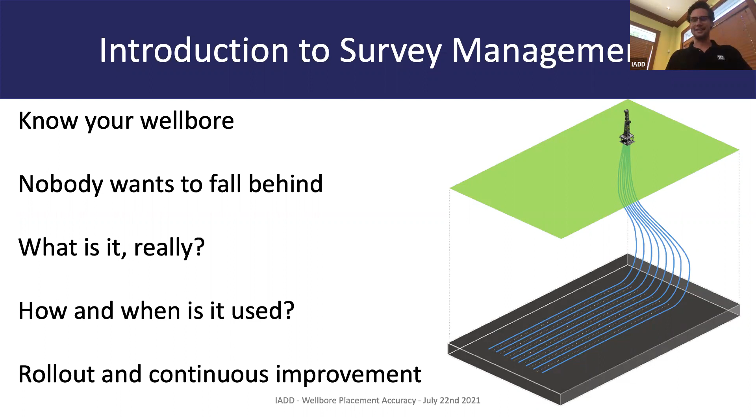So the first thing I'll actually ask you all: why do we survey? Can anybody tell me why we survey? Yes, thank you. That is exactly right. We want to know where we are, right? Whether we're surveying our property lines or we're taking MWD surveys, we want to know where we are. But sometimes it's not just good enough to know where we are. We need to survey accurately.

And this might be we're infilling an existing pad. In this case, we might be surveying or at least correcting surveys from old historical wells because we want to know where we can put our new wells. Some new drilling campaigns are just designed to have tight spacing, and that's really important to know where they are. And that ties into avoiding collisions, which I think should be pretty obvious why we want to avoid most of the time.

I used to make the joke last year that survey management can help us socially distance our wells, and also help us avoid trespassing. And that's crossing lease lines, crossing hard lines. Knowing where our wellbore is more accurately can allow us to achieve these goals.

When we're talking about production, as I mentioned earlier, it can help you stay on target, stay within your zone more efficiently and more often. And finally, wellbore quality ties into all of these things. You'll hear the word tortuosity thrown around a lot, explaining these bumps that are probably not recorded within surveys. But knowing those can really help us make those decisions down the line.

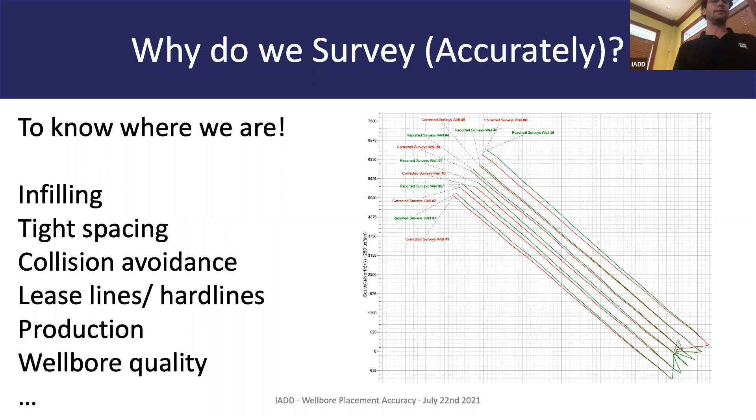How are we going to run casing? How are we going to install these pumps? What kind of life expectancy do we expect out of those things? So the first thing we need to talk about is the magnetic field. The Earth has a magnetic field, and MWD tools basically work like compasses. They align with the magnetic field, which runs north to south.

Unfortunately, we don't just put compasses inside of our BHAs anymore, even though that's basically what single shot surveys used to be. Go down, take a picture of a compass, bring it back up, see which way that compass was pointing. We also can't put a GPS inside of our BHA, because I don't know about you guys, but my GPS doesn't even work in my parking garage at work, let alone downhole.

The thing to know about the magnetic field of the Earth is that it's always changing. And before I get berated by the geophysics team, let me explain what I mean. It changes because there's a main field. The main field is in the outer core of the Earth, and it's a bunch of magnetic material that's all melted and sloshing around, creating this magnetic shield, shielding us from cosmic rays and the sun's radiation. And it also allows us to take MWD surveys, which is why I'm talking about it.

And this changes over time, all the time. Magnetic north today won't be the same magnetic north tomorrow or in 10 years. It's always just drifting around. And in fact, the north and south poles have switched completely, millions and millions of years ago. Hopefully it doesn't do that anytime soon, because it'll be an issue for our infrastructure.

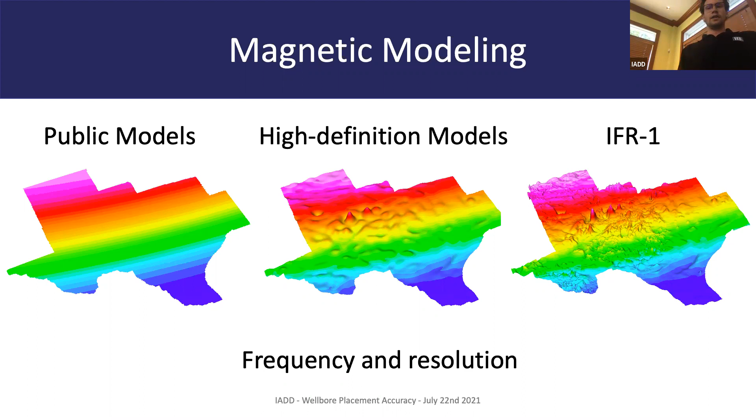So to go one step further, we can take direct observations to create these models as well. So this is extremely helpful for places where we either can't fly, things like planes, or usually what happens is that a company or somebody has an IFR coverage somewhere, but they didn't really anticipate drilling right outside of it, but now they don't have that high resolution data.

And so what can happen is just sending people out to the field. We'll send this guy with a theodolite out there, just taking some measurements. And we can add that data to the main field data or high definition data. And we can create a model that's IFR or better in terms of the resolution. This can also be applied on top of IFR1 if we really want to reduce that uncertainty even more. But I think the really big value is creating IFR in places where there hasn't been that data captured yet.

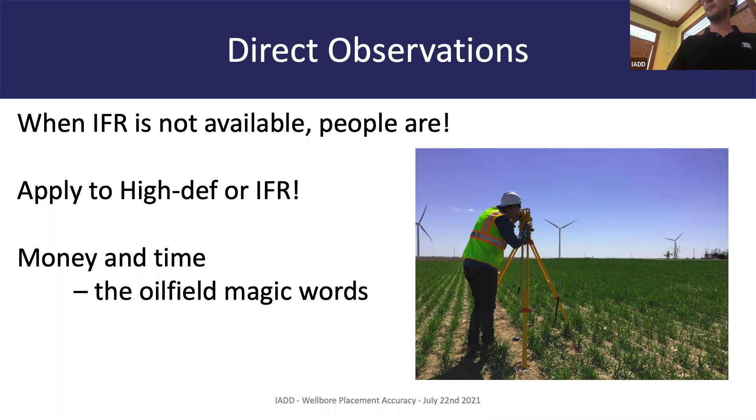This is pretty great because it saves money and it saves time. And as far as I've been in the industry, I can pretty much say those are the magic words that I hear every time. We need to go faster and we need to do that to save money. So what's next? I mean, finding the magnetic field and getting a good model of that is great. There's other things that we sort of need to consider.

MWD tools are created by 6 sensors, 3 magnetometers, 3 accelerometers. Some of them measure gravity, the magnetometers measure the magnetic field. And just like any measurements, these are going to have some errors associated with them. Well, the very biggest one is going to be drill string interference. And drill string interference affects that magnetometer that's pointing forward. And this is because your BHA isn't made of plastic. There's some non-magnetic material there, but there's also a motor and there's also some drill collars and all sorts of things that are creating this magnetic field.

And it's essentially just like holding a magnet to a compass. That compass is just going to align with that magnet. And now we don't know where north is anymore. So if we don't take this into account, we're going to be going the wrong way. What's important to know is that things like choosing a better magnetic model doesn't really require any more workflow. You basically just get that magnetic model and use it in your data.

Something like correcting for sensor errors does require workflow change. And so this can be a little bit difficult for some people who just want to do the same thing over and over. But this requires some sort of analysis. In some cases, this requires extra surveys in some places, namely drilling an east-west lateral can be very difficult or impossible if the proper workflow is not taken into account.

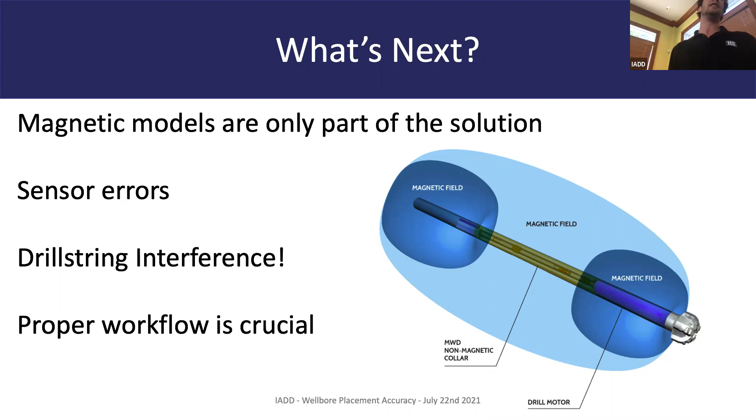But wait, there's more. There's misalignments. So I like to say there's different flavors of misalignment. The most common flavor, vanilla, is going to be our sag error. So this is probably the most common error when we talk about misalignments, and it's sag. Usually I just explain this as a steel beam supported on two sides, and for lack of a better word, it just sags in between those beams.

The issue comes up when the MWD tool is in part of that sagging area of the BHA, and now it's not representing where the bit is pointed. And so over time, we just have consistently incorrect inclinations over and over and over. And now we have a TVD error at the end of the well. So it just kind of accumulates throughout the well.

Other flavors, so the sensor packages, and what I mean by this are the accelerometers and magnetometers, those three aren't aligned axially, so it might be twisted, for example. And then single sensors, so maybe just a single magnetometer within the tool can be at, I don't want to use the word non-orthogonal, but it's no longer at 90 degrees, so it's just not where it should be.

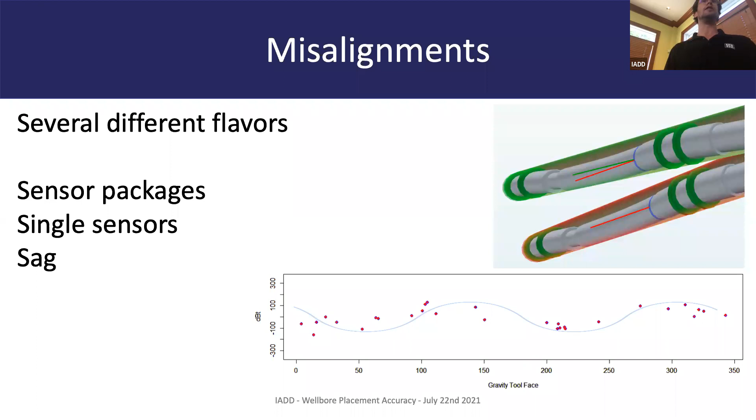Things like sag, we cannot see with downhole data. QC data is not going to show you anything because you're still measuring properly. We're just not measuring the bit's behavior. Single sensor and sensor package misalignments can be seen, but you really need to know what to look for. So some of these are tool face dependent. Some of them have different behaviors that if somebody's not really looking out for it, which typically in the field they're not, they're just going to go unnoticed. And these can have some pretty serious ramifications on bottom hole location that'll just go totally unnoticed if they're not being looked for.

Another one that's been quite popular in the last few years is survey frequency, also called the Stockhausen effect or survey aliasing. This is basically all relating to surveys being hopefully taken at 90-foot intervals. But what happens in between, right? We don't know. There's this assumption that surveys between them are just perfectly circular arcs. I don't think anybody truly thinks that's the case though.

There's some sliding and then rotating, or maybe there's some rotating and then sliding. Maybe there's a little bit of both. Maybe the formation is dropping you. Maybe your motor has some sort of impact on your inclination, and we're just not capturing that because all we look at are surveys every 90 feet.

But lucky for us, most of the time we have the data, just nobody wants to look at it. It is pretty ugly data, but we're in the data analysis group, right? So we should be fine handling that. Once we actually look at the data, we can see these trends and apply those trends to our wellbore trajectory and get a more accurate representation of where we are.

So this really isn't anything new. The first paper from Bill Lesso and Ed Stockhausen was about 20 years old. And these are things that offshore drilling has been doing for quite some time, because if you have the data, you might as well use it. And I think they are more inclined to use a little bit more technology. But US land and other land drilling operations are starting to catch on. I'm not sure, this might have something to do with LinkedIn just kind of blowing up with this.

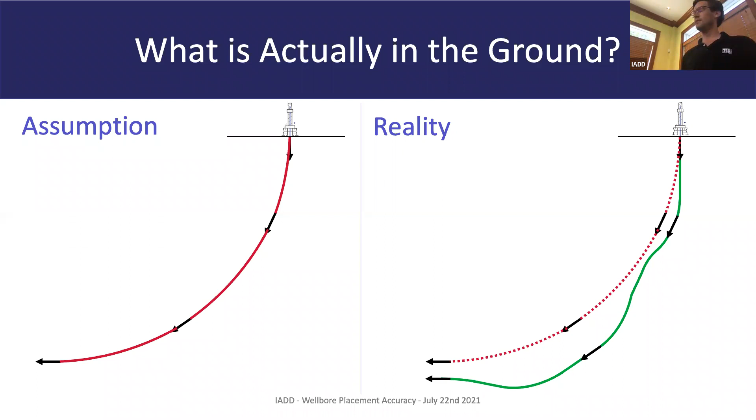But an important thing to remember is that it's not just all algorithms. Algorithms are great. Believe me, I love them just as much as the next person. But it's important to see the other side of things as well. We need to focus on our workflow. We need to all be working together. There needs to be this group mentality of having centralized data, data that we can get once and don't have to ask for again.

If we're running multiple services as a survey management company, it's important to not be berating people with, oh, I need a well plan. Oh, I need the well plan again. And I need the BHA reports and so on and so forth. It's so important to build that relationship, make things easy, and streamline the entire process.

And when we say QCing data in survey management, we're typically thinking, what's the total magnetic field? What's the dip angle? What's our total gravity? This typical QC data is great and very important. But on top of that, we need to make sure that all of the data we receive is also QC'd.

I think we had one well that was supposed to be drilling in West Texas, and they added a 0 or their geodetics was wrong, something, and they ended up in Florida. When you submit those surveys, that should raise some red flags. We drilled the fastest, longest well in the world, you know. So those things are very important, and they're easy to let slide by.

Things like the floor height of your rig, your RKB, your location, all of these things. They just need to be double checked and cross-referenced, and we need to make sure they're correct. So there's more than just a data analysis side. It's also a document revision side.

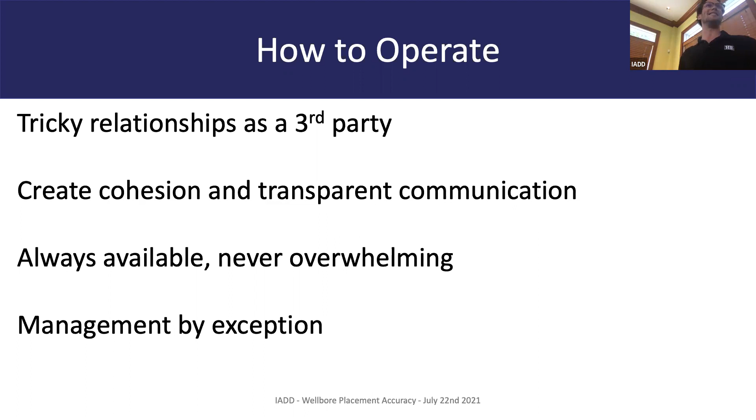But it's important to have that distinction and create this escalation process that we can be confident in and that everybody that we work with can be very familiar with. And so always available, never overwhelming. Somebody can use that tagline. I worked hard on it.

In conclusion, better data, better decisions. Papa John's. I'm sorry. Better data does mean better decisions. And algorithms can't create that data a lot of times. They can help us correct that data. They can help us prove that that data is correct. But having empirical, measurable data that we can actually look at and put our hands on, figuratively, is just very important. We can trust algorithms, just don't rely on them.

At the end of the day, communication is paramount. Keeping an open line of contact between every single one of the customers, everybody who's involved in the process. Keeping that education, just like things like today or all of the other conferences. It's all about sharing this knowledge and hoping that there's some knowledge shared back, answering questions, and then maybe leaving with some better questions.

And finally, that transparency. We want people to know what we do. We don't want to be mysterious. If somebody has a question, we absolutely love that. Sometimes you have drilling engineers that are extremely involved in the process and just want to know, how does this even happen? Well, we need to be able to answer those questions. We need to have people who are comfortable speaking to those people. And that's pretty much what survey management is, keeping that communication open so that everybody can be on the same page. So with that, let's make some hole, and I'll open it up for questions.

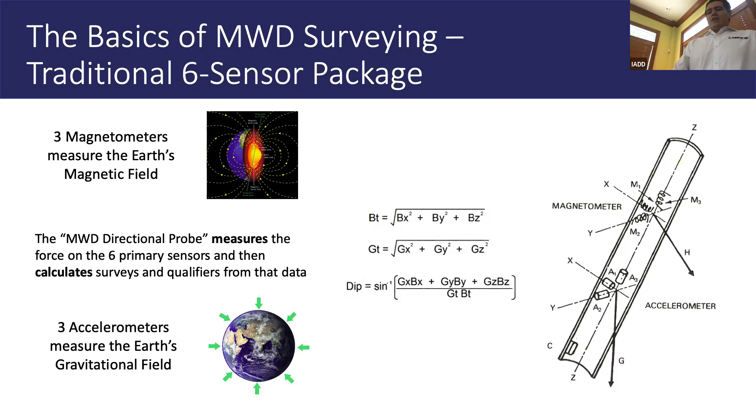So those models are not perfect. You're never going to know exactly at that point what you should be reading, for some of the reasons that Nico mentioned, that the magnetic field is always changing. And you're basically drilling underground. You're not taking direct measurements of what that field is going to be underground. So we're doing our best to model that information. And here you can see that even with IFR2, you're still going to have some uncertainty associated with those magnetic fields.

And that means that when you are taking MWD surveys, you're comparing it against the values that you're pulling from these models. So you have an MWD tool, which has some uncertainty associated with the measurements you're taking, and you have a model, which has uncertainty associated with the values you're pulling from that model. So when you're taking MWD surveys, you have to know and weigh those uncertainties properly. So with that data, you get a survey, but you also get some associated ellipse of uncertainty with that. So what is that ellipse of uncertainty actually telling you?

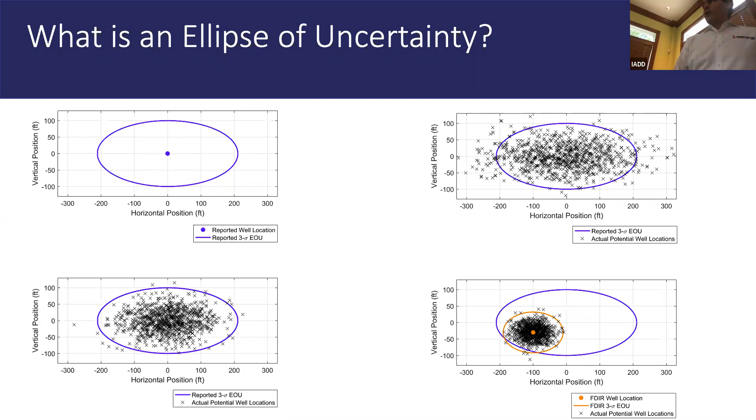So when we look at survey management, the way that we like to describe it or walk through the progression of the technology is through generations. And each generation is a step change improvement upon the previous generation, right? So the way we view it, there's four

This is what the field uses to qualify surveys. So this is what the MWD hand is doing when he accepts surveys. So basically, like I mentioned before, the MWD tool is calculating the magnetic field, gravity field, and dip angle, and it has to compare it against the reference field model.

So let's say, for instance, here that you have IFR. You've pulled IFR values for this specific location, so you know what your tool should be reading. Now, you take a survey, it pumps up values that are slightly different than that. So you take what your tool is reading, you subtract off what you're expecting to read, and that difference is called a residual, right? So here we're going to take a look at a specific survey and whether or not it passes what we call field acceptance criteria.

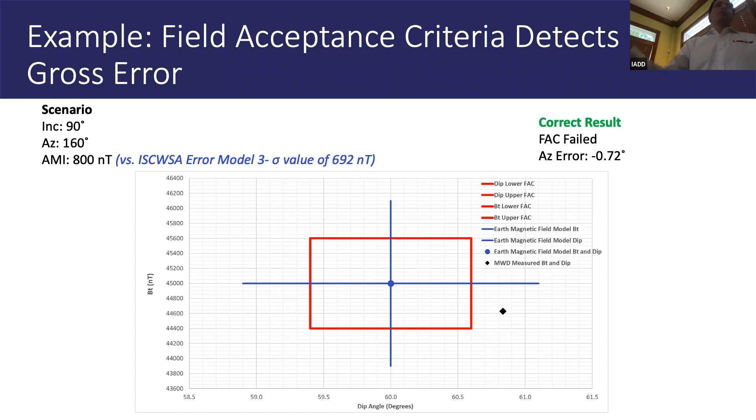So in the upper right-hand corner, you can see, okay, you got a good result. So there was 0.72 degrees of error in this azimuth. We caught it, and we didn't accept that survey. So what happens if we change the scenario slightly? On this slide, we're saying that we're at 90 degrees inclination with an azimuth of 160 degrees. And the error that we caught was that there's actually drill string interference of 800 nanoteslas, which exceeds the limits in the error model. So we caught the proper error here.

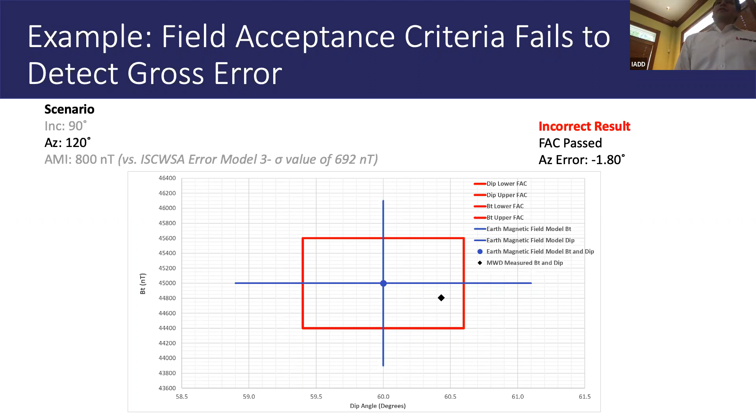So that is just highlighting what field acceptance criteria is, how it's built to detect gross error, and how it can fail. So we got a little bit smarter as an industry. We knew that was a problem. And what we did was we came to the conclusion that drill string interference was a problem, right? That we know that having ferrous components in the BHA next to a MWD tool is a problem.

So what could we do about it with generation 2, which we're calling single station correction? So what we're doing with this is we're taking the magnetometer reading that is most interfered with, and we're just going to throw it out, right? So we know that it's interfered with, and we know what it should be reading because we know that from the model, we have a total magnetic field and dip angle. So we know what those values should be based on the model.

And so what we can do is take that interfered with value from the magnetometer directional sensor. So in this case, we'll take this BZ reading, we'll just throw it away, and we're going to back calculate what we thought it should be based on the model. So when we do that, we're assuming the model's correct. And we're assuming the only error is axial magnetic interference. So if you assume that, you can actually introduce more error if you don't know for sure that your model is accurate or that there's no other errors that could be plaguing that sensor reading.

So this was the way that we used to do it. Sometimes we still do. It's not the most accurate model, but it's an improvement over doing nothing, right? So one of the other frailties, I suppose, with that is that you do it on a survey by survey basis. You don't do it by looking at the data as a whole. You do it survey by survey, which means that the calculation that you're getting for how much axial magnetic interference is actually interfering with your survey changes every time you do that calculation.

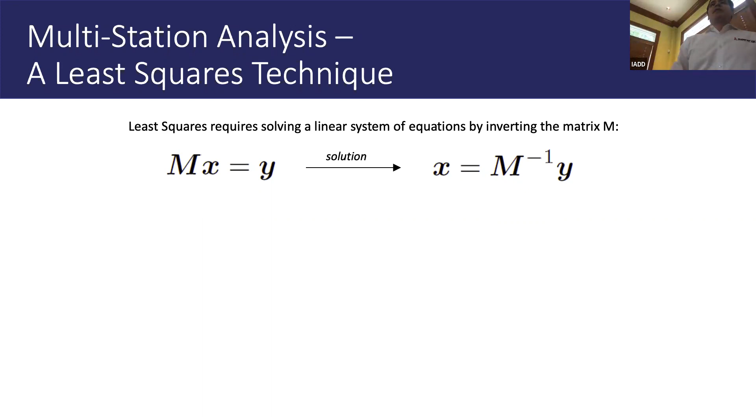So what you've got to do is you've got to take that matrix, the capital M, and move it to the other side of the equation. That is easier said than done, easy on paper, hard to do in math. So if that matrix gets too big, then you can't move it over effectively. The numerical condition number of that matrix is too big. And when the condition number gets too big, then it spits out basically numerical garbage, which is not reliable in calculating your actual error terms.

So basically what that means is you have a limitation on how many of those error terms you can solve for. So generally speaking, you can solve for about 3 to 6, maybe 7, 8 error terms at a time, but there are more than that that could possibly be impacting a survey.

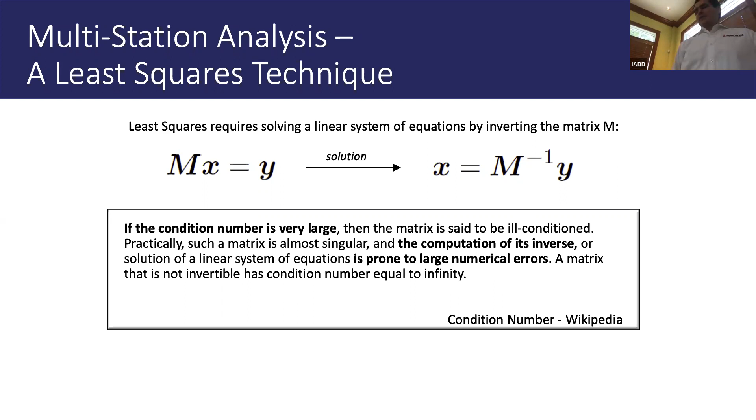So this is multi-station analysis ability to... So let me rephrase that. So yes, the limitation is computational power. The solution is changing the way you do the math, right? So this is the least squares approach, which is what multi-station analysis uses. It's not the approach that the fault detection, isolation, and recovery algorithm uses, so we don't run into this issue. So that's basically what this slide is showing, is that we don't have this problem.

What effect would independent outrun surveys have on that? What's that? What effect would independent outrun surveys have on calculations? So not much. You still have to run them through a similar algorithm, right? If you're just talking about memory outrun mode type of surveys, they still need to be run through a similar algorithm to clean them up, because they're still in the same environment as the static surveys.

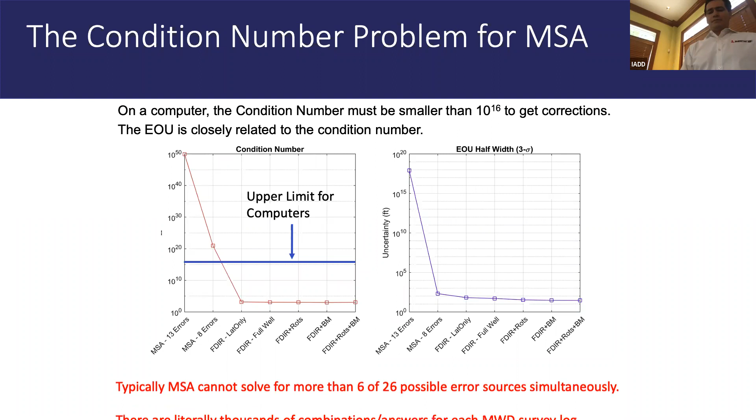So our founder, Chad Hanak, actually started in the industry as a multi-station analysis coder. He wrote a few flavors of it. He saw that this was a problem, and what he did about it was he invented Superior QC.

So the problem that we were trying to solve was that if you can only solve for 6 error terms at a time with multi-station analysis, and there are 15 possible error terms that impact the azimuth in the ISCWSA error model revisions, if you try and select 6 out of 15, there are 5,005 possible selections. So nearly impossible to get right every single time. So we're making our best estimate with the data we have, but it doesn't mean that we've gotten it right every time. So that is also a problem we're trying to solve.

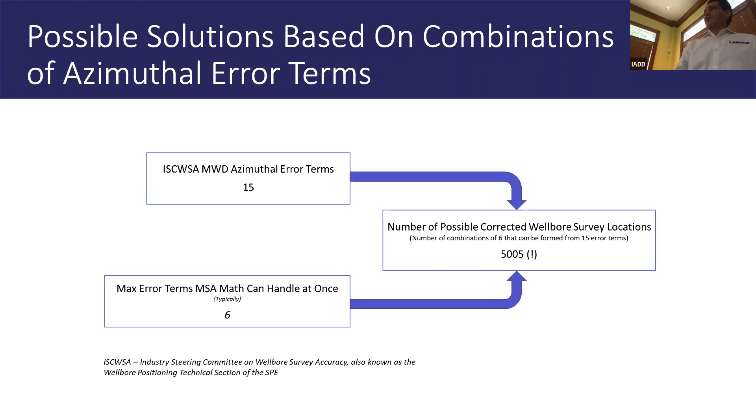One more thing that plagues the multi-station analysis algorithm is that it's very difficult to drill near east-west, which has been touched on before. The reason is that you run into a problem where your Z magnetometer reading consists overwhelmingly of drill string interference in that direction, just because you're perpendicular to the actual direction of the magnetic field. It becomes very difficult to solve that term to a high degree of accuracy.

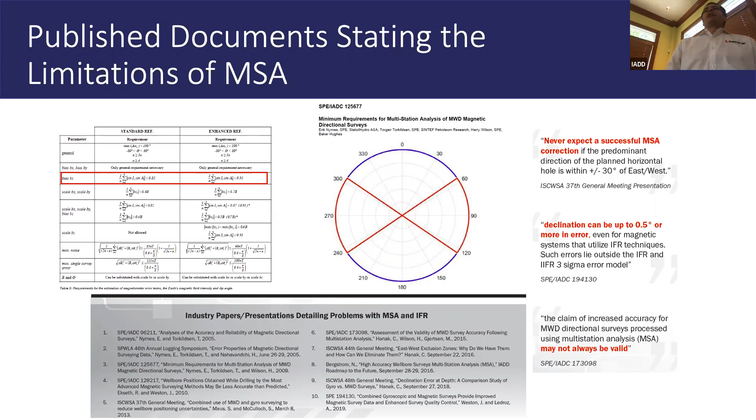So there are plenty of research papers out there saying that we should not use this approach when drilling near east-west. And our fault detection, isolation, and recovery algorithm has been built to account for all the things that I just mentioned, which were frailties in Gen 3.

So now we move to Gen 4, which is the fault detection, isolation, recovery, or FDIR, which is the superior QC product. So we don't have an east-west exclusion zone, and the reason is that we take a higher level, more comprehensive look at the data. So it's not limited to a run-by-run approach. We can look at the vertical, the curve, the lateral, all together as one. So we take kind of a big data approach, data analytics, to solving for some of those error terms.

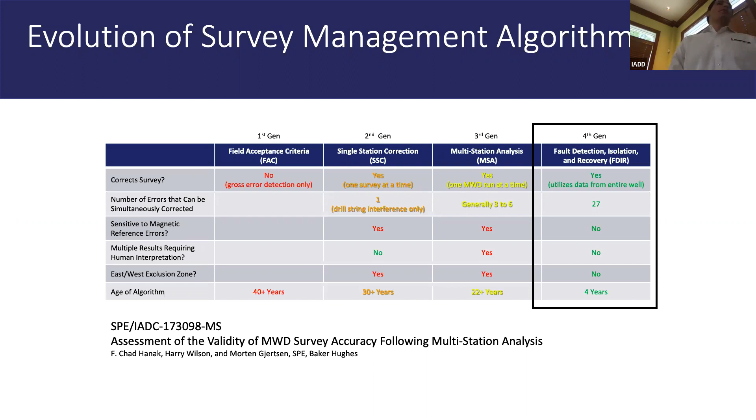And there's only one solution. So we take all of them in together at once. We're not trying to pick and choose which error terms we solve for. We solve for all of them. So we don't run into that computational error that I mentioned before. So I will end with a short explanation as to how you can look at all the data together to solve for error terms that may be present in one section that relate to other sections.

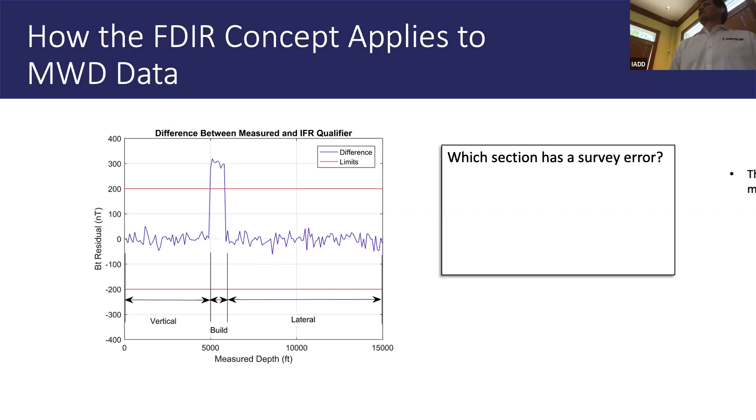So if you're just looking at this data by itself, you say, all right, there's not much error in the vertical, not much error in the lateral. There must be something going on in the build because it exceeds the limits. But if you look at the build, what you can see, and what we do on the back end, is you can identify certain aspects of that error, which are characteristics of a particular error term. So in this instance, some of the characteristics indicate that there is a magnetic field strength error.

So like we talked about on the first slide, even IFR has the ability to have some error in it. Mostly because you're not reading measurements downhole, you're doing your best to model it from surface. And the problem with noticing that that is a magnetic field strength error is that it would not only be present in the curve, you're reading the magnetic field in the vertical and the lateral too, right? So you would expect that it's also in the vertical and the lateral.

So what does that mean? That means that there must be something that's also there in the vertical and lateral, which is causing sort of a negating effect on the error distribution residual effect here. So you have 2 errors. So you have for sure a magnetic field strength error in the vertical and lateral. You just have something else countering it, which can be tricky to solve for. But if you look at all the data as a whole and you notice that the build is what's causing the error, you can apply it in the vertical and lateral too.

So that's the approach that we've taken with FDIR. And it's how we use the data to more reliably provide a solution for you. Yes.

So we'll apply a correction to the magnetic field in the curve and the vertical and lateral, but we'll also look at each section of the wellbore independently, because you do have errors that are only related to a run, right? So your drill string interference is not the same for the whole well. It's different for each BHA run, but things like a magnetic field error are consistent for an entire well. So it's looking at it both ways. You're looking at it run by run, and you're looking at it as the whole well also.

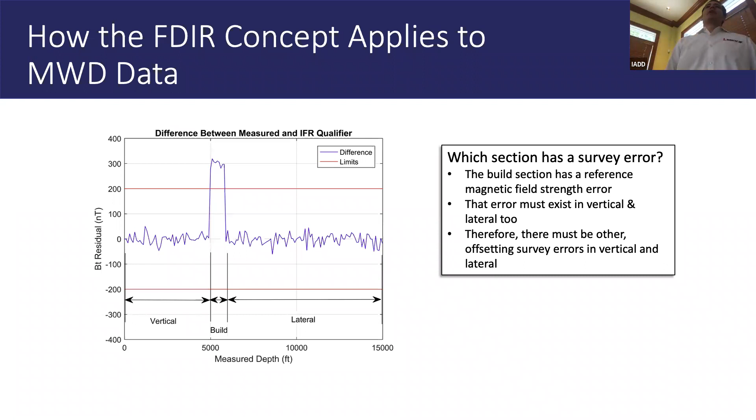That is all that I had, so I appreciate your time. And if there are any questions, fire away.

You're gonna have to answer. I'll read it to you. Yeah, you can't really read that, it's pretty tiny. So, Mr. Jim Shin: low resolution models like WMM and high resolution ones like BGGM, do they differ a lot when it comes to tracking temporal changes of total magnetic field?

Is that a question for David? I think that was Nico's first slide, but then let's put that one back to the panel. Or we can do it, Nico, you can answer now. Yeah, sure, if you want to. Yeah, we gotta go.

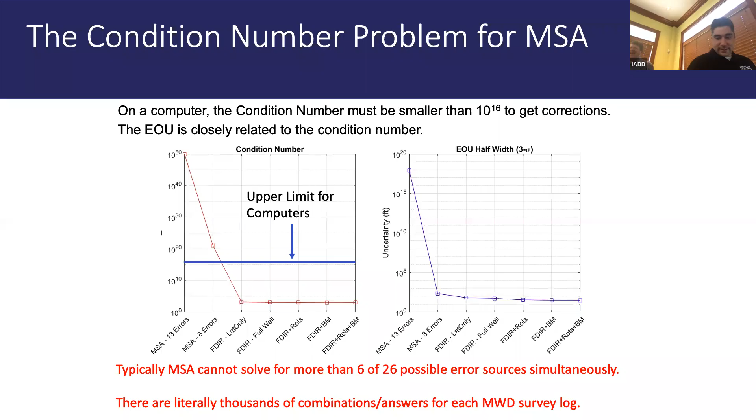Thank you, Robert. Thanks. You can start. Let me get it started for you. Well, thanks for that introduction. I don't know who wrote it, they did a good job. I'd love to meet that person. When you said early days, you really mean early. Oh, I mean the early days. Wasn't it just WD back then? It was just M at the time, actually. There we go. Boom. There you are, sir. And it'll be just the arrow keys.

Yes. Good. Thanks. Well, thanks very much for having me along, Jim, and IADD. It's one of our things at ISCWSA to try and spread the message. So I'm very pleased and grateful for the opportunity to do this.

What I'm planning to talk about here is just a quick introduction to the ISCWSA, for those of you who haven't been quite so aware. A bit of a summary of our more recent work, and an introduction to the online training course that we'll be offering later this year, which I think is one of our big things, and just a mention of our upcoming meeting in October.

So yeah, as you can see, the ISCWSA was founded in the mid to late 1990s, primarily because of some of the false advertisements of what MWD companies, some of the survey companies, were advertising and trying to compete. So we wanted to raise awareness and understanding of wellbore survey accuracy. We also work therefore to produce and maintain standards relating to that survey accuracy and wellbore positioning in general, and the terminology and accuracy specification to help support that and help explain what that means across the board.

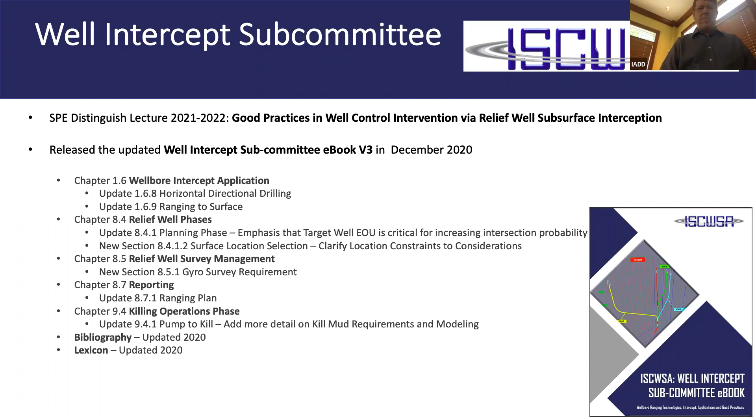They've also released the latest version of the free ebook on well intercepts. It's very clearly titled, very creatively titled Well Intercept Subcommittee ebook, so easy to find. And there are some of the topics that they've looked at on there.

The online training course is the big thing we've got going on these days. This course was previously developed and run by the University of Highlands and Islands in Scotland with Professor Angus Jamieson, who one or two of you may have come across in your careers. They found that that's no longer part of their curriculum, so they agreed to let us take over all the materials, all the course.

So we're in the process of converting all that course to run under a modern learning management system for online course. These are often known as MOOCs, massive open online courses. Ours is a small private online course, which is a SPOC, so maybe appropriate for drilling in Mars as well.